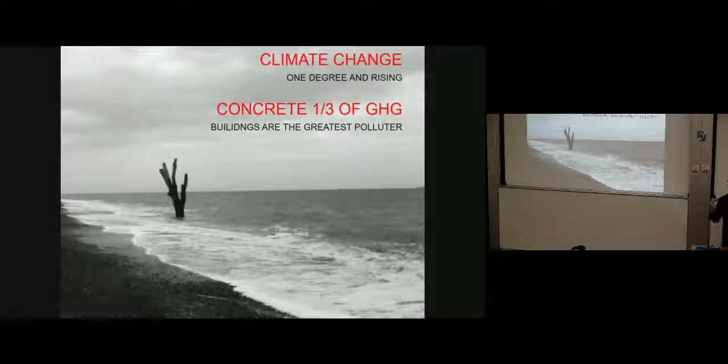The idea of what this climatic event, what this terrible issue surrounding us, did to our architecture, what that did to the architectural expression of contemporary culture, to me, was a nonsense. And that idea, faced with the notion of a world housing crisis, the idea that actually we're moving from a largely agrarian world culture to a largely urban world culture, that we need to start housing billions of people in the next few years.

In the UK alone, it depends which political party or which magazine you read, but between 200,000 and 300,000 homes a year, and last year we built 110,000. So there's lots of work to do, lots of houses to build, and we need to build them in such a way that we don't contribute to climate change, but that we help mitigate climate change.

So this is us in 2003. We were a bit smaller then, and as you can tell, we built mostly nightclubs and restaurants and house extensions and kitchens and that kind of thing. And in 2003, the first set of planning guidelines came out in terms of environmental awareness, and eco homes it was called.

And eco homes said that if your building wasn't near a bus stop, then you would need double glazing. However, if it was near a bus stop, you'd be okay. Now, as an approach to climate change, that struck us as rather short-sighted. The idea that there were just small changes that we could make, with this massive impending problem coming toward us, seemed to us fairly ridiculous. So we started to dig a little deeper and think about not just energy use, but also the building materials that we built with, the process of construction, how that worked, what kind of impact that was having.

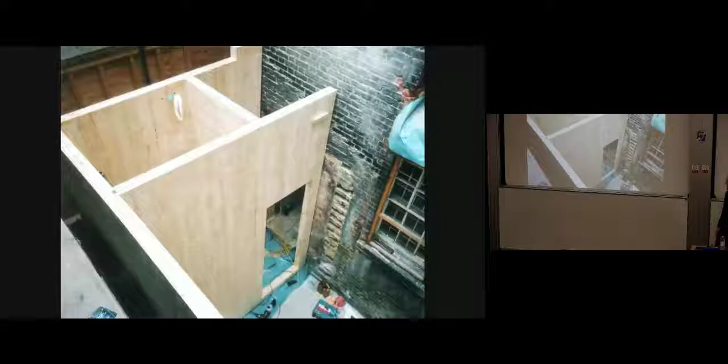I've never been back, by the way, but anyway, it's a 45 square metre, 2-storey extension to a 17th century building near Waterloo. And it was completely landlocked, so we'd been concerned for some time how we were going to get the building materials through the building or over the building.

It was really beautiful. The idea, the notion of the construction process, of the practice of architecture involved in this tiny little building was really, really exciting. And so for the next few years, we researched and designed and interrogated people about CLT. And now this is CLT.

I don't know if everybody knows what cross-laminated timber is, but just really briefly, it's secondary grade timber from the outside of a pine tree, usually a European spruce. So the timber from the outside of the tree, the stuff that gets made into paper and cardboard, that gets chipped for fuel, that kind of thing. So really fairly waste product.

And what they do is they finger joint planks of about 75 millimetres by 25 millimetres into long lengths. They lay them out and they spray them with a PVA, so a water-based adhesive. Like the kind of stuff that if you put on your hand and you go like that, it all sort of wrinkles up.

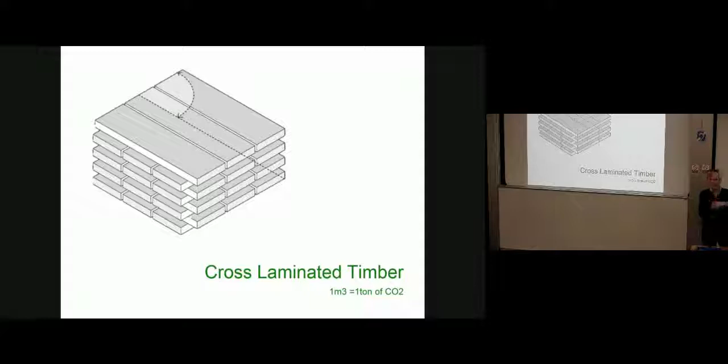So PVA adhesive, and they're laid down in perpendicular layers on top of each other at right angles, and they're built up in layers to the performance that they need to meet, whether they're floor slabs or walls or whatever they are. So less than 1% adhesive, a formaldehyde-free adhesive, and nothing else. So just the pine and the adhesive.

Now the material was invented in Austria in the 1990s because they weren't doing anything with their timber. All the trees that they had were going to seed. And so the word went out from the Austrian government, find something to do with our trees. And so the Technical University in Graz came up with this as a notion. A couple of factories were starting to produce this in the 1990s, including this one, which is KLH in central Austria.

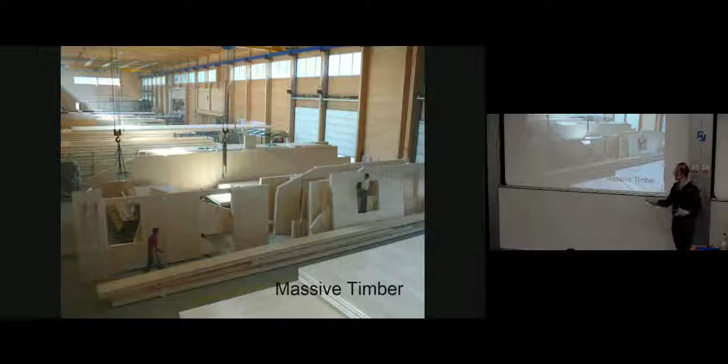Now you can see these panels here coming out of the factory at about 16 metres long by 3 metres wide, and anything from about 70 mil thick to about 500 mil thick, depending on what they needed to do. Now you can see all the doors are cut out, roof profile here, window cut out, and in these factories, all the cutouts go to the biomass generator, and the whole factory is off-grid. So, in fact, in this one, it even powers the village where all the workers live as well.

So in 2008, we had been honing this argument and doing lots of research and talking to lots of different engineers. And in 2008, we really had a pretty clear notion of how you build and what you can build with this material. And we got this job in Shoreditch on a council estate in the part of Shoreditch where people don't go, and it was an old pub site, and it was very clear that from an extrusion of the site plan to about 9 storeys, we'd get about 4 flats a floor, and so we'd get about 30 units on the site.

So we went to the local authority, and we said, we've been studying this material for a long time, and your planning requirement is for us to reduce the carbon footprint of this building by 10%. Now, if we build this building in timber, just the amount of carbon that's stored in the building itself is equal to the amount of carbon that the building will emit for 25 years. So actually, that 10% reduction is over 25 years' worth of energy use.

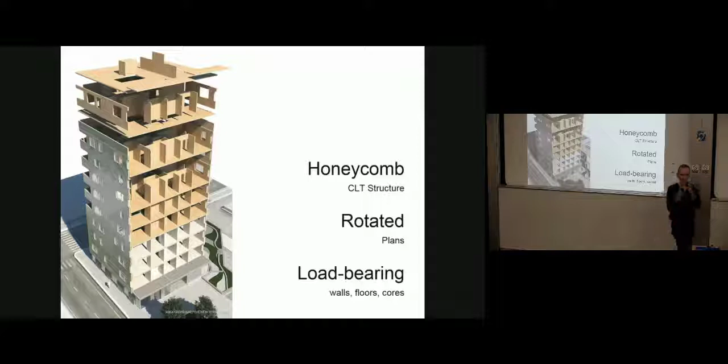So we were able to, this should be a film. Is it going to be a film?

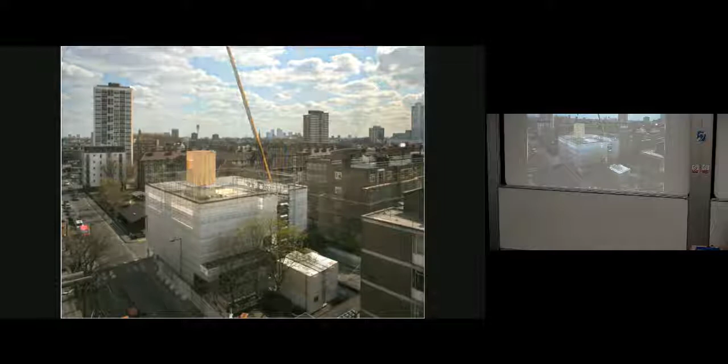There you go, look. So this is definitely the part of Shoreditch you haven't been to. This is the stairs here, lift core going up here, and the slabs going around. So the Austrians arrived by truck on a Tuesday morning. They put panels up on a Wednesday and Thursday. They worked a 3-day week, and they built a story a week. So 4 people built the entire building in 27 days. So you can see it going up here, no tower crane.

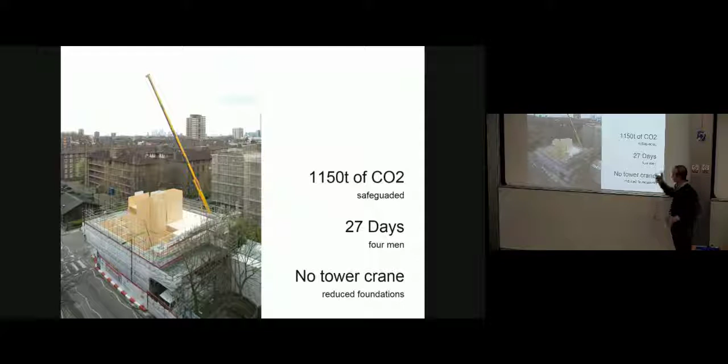So over 1,000 tons of carbon dioxide safeguarded within the timber structure itself, no tower crane. A tower crane costs about £80,000 a month to hire. And you need to put in special foundations for a tower crane to set into. So not having a tower crane is a major advantage to any contractor. So obviously, we were able to persuade our client to build this building in CLT. And they sold all of the flats in 1 hour and 15 minutes.

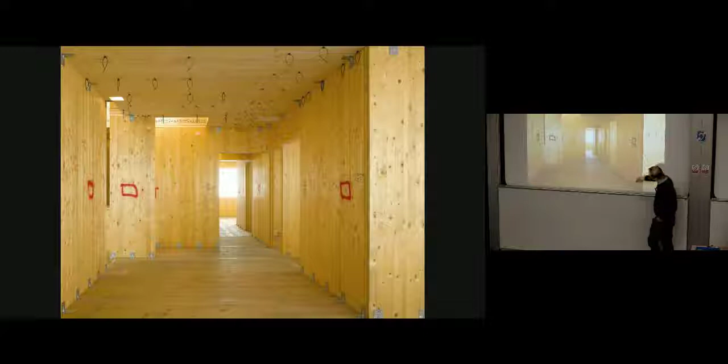So this is the internal structure here. You can see this is one of the double height spaces here. This is the building going up. So you can see the whole thing is put together, fastened together with 75 millimeter galvanized shelf brackets and 100 millimeter screws. You can see in the ceiling here, these are the little ties for the electrics. So the electric cabling that runs through the ceiling.

The electrician explained to me that when you apprentice as an electrician in the UK, you spend about the first 18 months hammer drilling into concrete. And then after about 18 months, your shoulder joint disintegrates. And when it's disintegrated, then they teach you about electrics. So he explained to me that actually, not just in designing these buildings, but in the construction of these buildings, the builders working in these places are safer and happier. It's a better working environment, a better place for a builder to be. And much, much faster.

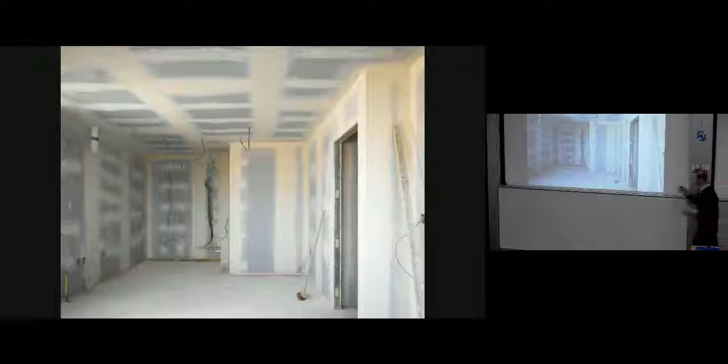So some of the advantages that we hadn't realised, that we hadn't calculated in terms of the speed, was actually the people that came in afterwards. So all the people that did the dry lining, the plasterboarding, all the people that did the electrics and the plumbing, so much quicker, so much easier to do. So once we had finished the entire structure, we covered the whole thing with plasterboard, which for many people, going from that to that is a bit of a tragedy, oh, but where's all the timber gone? It's so useful.

And I think for us, the mantra was from the very beginning that we need to demonstrate that timber can be a viable alternative to concrete and steel. That going back to the notion of actually building with a carbon store, rather than allowing our practice to be a peripheral one, those sort of sustainability practices with the hair shirt and the buildings that look very much like they're sustainable buildings. We didn't want to be involved in that.

We've never wanted to be a peripheral practice. We want to be a mainstream practice, working with the big house builders, making real differences to the sustainability and the environmental awareness of how we build all of our homes in the UK, not bird-watching centres or National Trust museums on the outside of town, but actually real understanding.

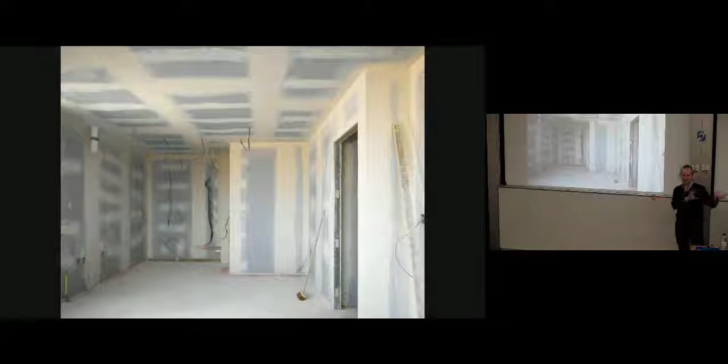So when we were working through the building regulations, our client said to us, we don't want anybody to know that this building's made from timber. And so you're like, fine, not a problem at all. Just a little article in the Evening Standard about it, but apart from that, we won't tell anybody. And covering it up in plasterboard actually means that we don't have to paint any of the CLT with intumescent. We don't have to fireproof the timber itself.

So actually the life cycle, the cradle to cradle idea of the timber, is that this material, after its useful life, can be reused for buildings, can be pulped for paper, can be chipped for fuel. Unlike if you paint the timber with intumescent, and then that goes to landfill at the end of its life. So the idea was that we kept the material breathable, fully recyclable, and for our fire protection, we looked to plasterboard.

Now, we won't be doing that forever without learning as we go; as people, other architects, including ourselves, better understand the way that the system can work, we'll leave more of it exposed. But when finished, it looks like all the development flats that our developer client was after. And as I say, they all sold in an hour and 15 minutes.

So going back over the job, less waste. This is our site waste after 9 weeks. The contractor had this old guy with a little rolled up cigarette in the corner of his mouth and a broom with nothing to do on site for 9 weeks. Completely quiet. The whole building goes together with cordless screwdrivers. So no jackhammers, no grinders, no cement mixers, no constant scurrying around with masks and gloves and goggles. Very, very quiet, very, very clean process.

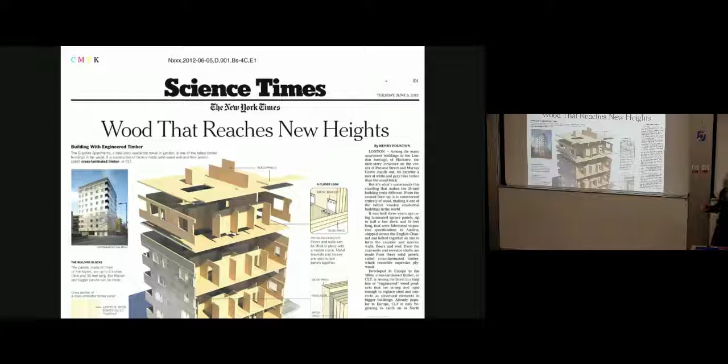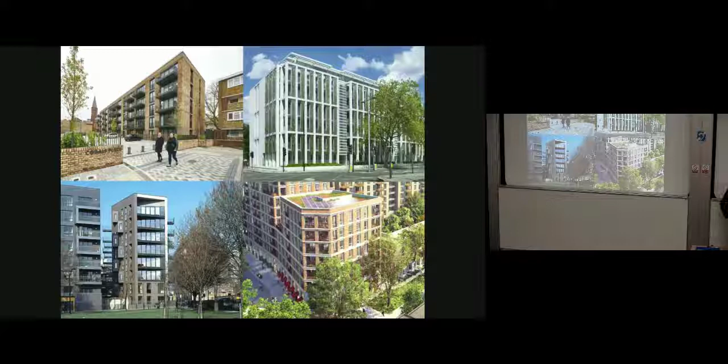So this article in the New York Times and others encouraged us to take this research and really run with it, to talk to people and teach about the research that we'd done. And to our amazement, this had produced a groundswell of interest behind this project. And this followed in London with many other projects. This is a Lend-Lease project, Horden Cherry Lee, Alex de Rijke, Allford Hall Monaghan Morris here. Lots of different projects coming through.

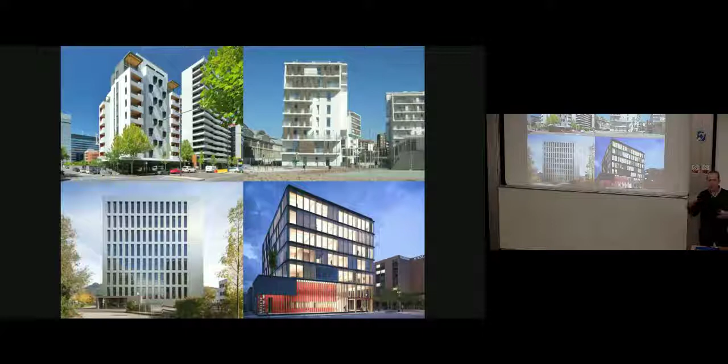Nearly 500 projects in the UK now built in CLT. And then across the world as well. We've worked consulting in Australia, in Italy, in Canada, Austria, on different projects. So really, suddenly the beginning of something. The beginning of a new idea about how we might build buildings. A new system, if you like, of construction and architecture.

So in 2012, finally, with two friends of mine, I found a site to build a house on. With my two friends, Jason and Dan, we bought this piece of land here. We sold our flats and our furniture and everything we had, bought the site, got planning consent, and ran out of money. So we sold the lower ground floor here, then went out to tender to the builder, agreed a tender price, and then sat the builder down and explained to him that we didn't have any money.

So we managed to persuade the contractor to lend us the money to pay him with, and he accepted. So, bizarrely, we paid him back once we'd finished the building. This building was a photographic studio for Dan, and flats for Dan, myself and Jason. It was supposed to be me and Dan and Jason, but Dan and Jason fell out, so I had to move in the middle. But they're friends again now.

Dan is a photographer, and Dan needed a studio which had to be a minimum of 9 meters wide, 6.5 meters high, and 23 meters long, with no columns and no beams. So how would we produce that? How would we make that space happen and still get our flats on the top of the building, which is what we wanted? What we did was to begin to use the CLT in a way in which you wouldn't be able to use any other kind of material.

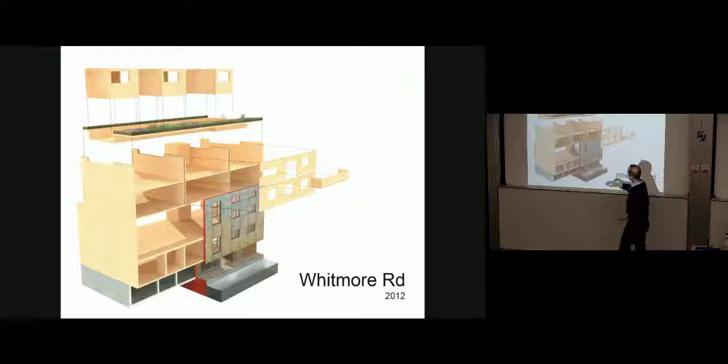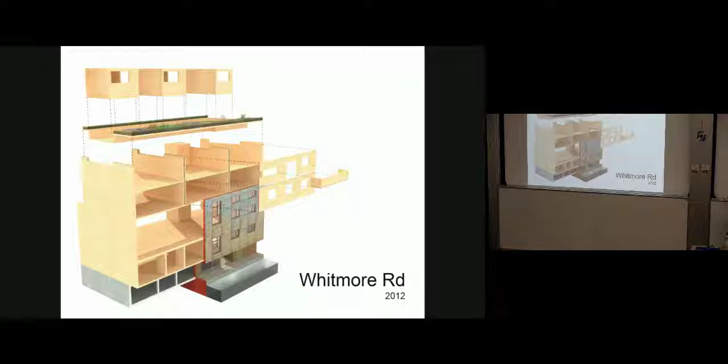The notion is that a wall in cross-laminated timber is a long beam, because rather than carrying the load straight down, it can carry the load all the way along as a beam. So we use the party walls between each of the flats as a deep beam, like a series of boxes, supported off the front and rear elevations, which act as giant trusses either side. That way we were able to hold the flats up above the photographic studio and have that studio as a completely open space. You can do that because of the light weight of the material as well. So the whole thing is really tightly tied together.

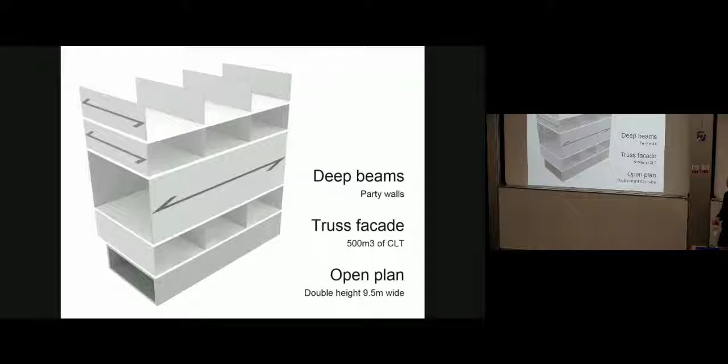500 cubic meters of CLT. So it's about a third of the CLT per square meter that we'd used on Murray Grove, mostly because I was paying for it myself, and it's quite expensive. Completely open plan, as I say, and this is the building going up. You can see this is the studio here.

The other thing we did is that rather than cut holes in the CLT panels, we've begun to use the CLT where it's needed most. You can see this is where the vertical loadings are going, using this as horizontal here, and here as the lintels across. So rather than cutting holes out, we're actually cutting down strips of CLT and using it in that form.

So this is the photographic studio in here. Hard to really understand quite how massive that space is. About a year and a half ago, we had the English rugby team in there doing one of those photo shoots where they all jump up and go like that. And I was fast asleep up here, just above the fire alarm, and I didn't hear a thing. So that's us, the first Christmas, clad in sweet chestnut.

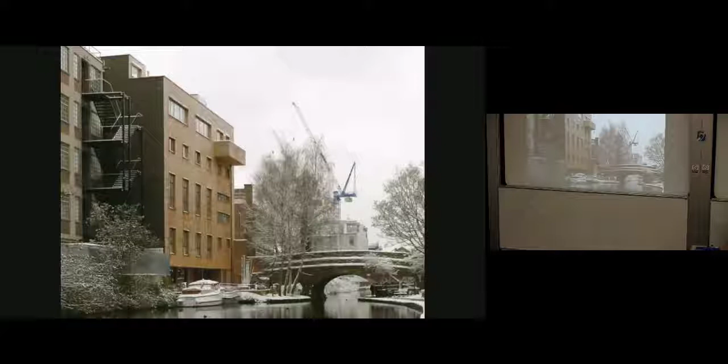I think what that building begins to do is to begin a conversation about something completely different, something completely new. If you think about 100 years ago, when the idea of reinforced concrete came to the fore, you had Corbusier and the other modernists talking about a new kind of architecture. That new kind of architecture came from a new material. And we now have a new material. We now have a suite of new materials in engineered timber. The kind of architecture that new material will begin to propose is what's particularly exciting at the moment. So what will these new buildings look like?

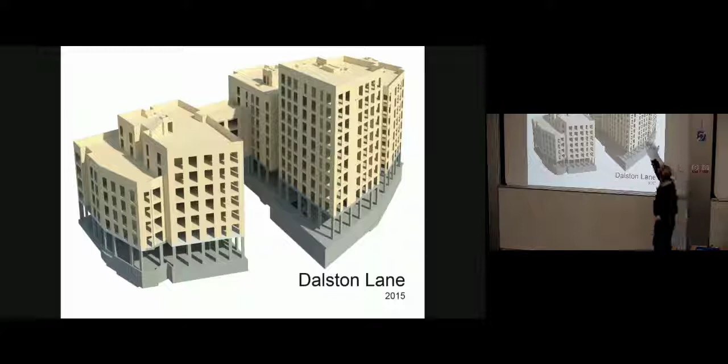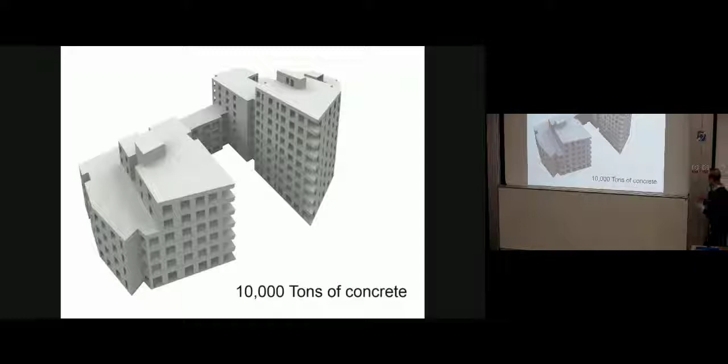So this is Dalston Lane, the building that we're working on at the moment, just finishing up. And this is proper. This is what we wanted to do. This is high density, high rise housing, about 10 stories, 121 flats, and 3,500 square meters of offices and retail, right in the middle of Dalston, in North London, a very urban, very tight environment. If we built the building in concrete, it would have weighed 10,000 tons. In timber, it's less than 2,000 tons.

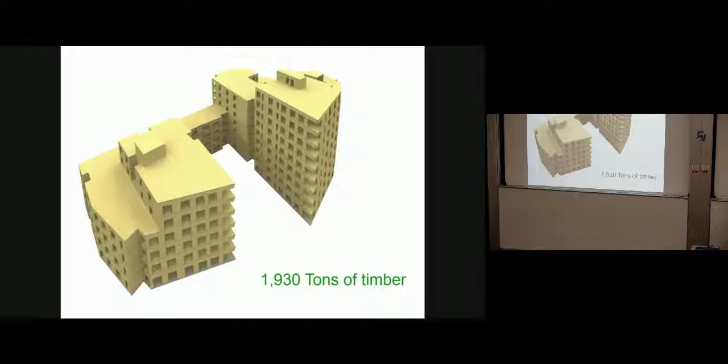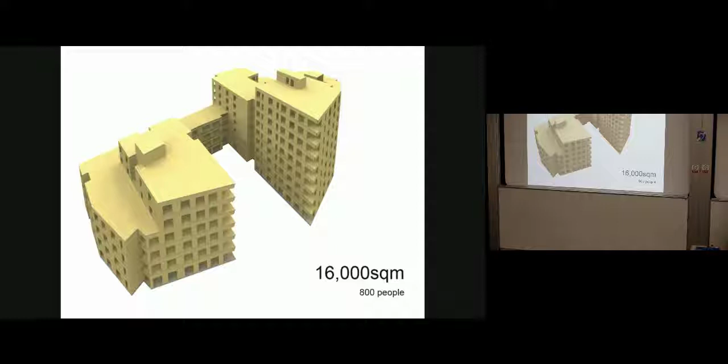170,000 square feet, 16,000 square meters. About 800 people will live and work in this timber building, which is about 4,000 cubic meters of timber, which is 2,500 trees. So just over 3 trees, 3.125 trees per person in this building.

Now we give away one of these buildings every day and a half on the tube in London in terms of free newspapers and free magazines. So the timber that goes to make this building is given away every day and a half on the tube. So this is us. This is a CGI of the building finished.

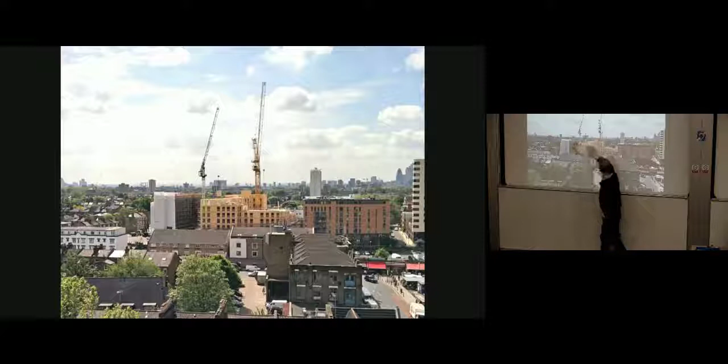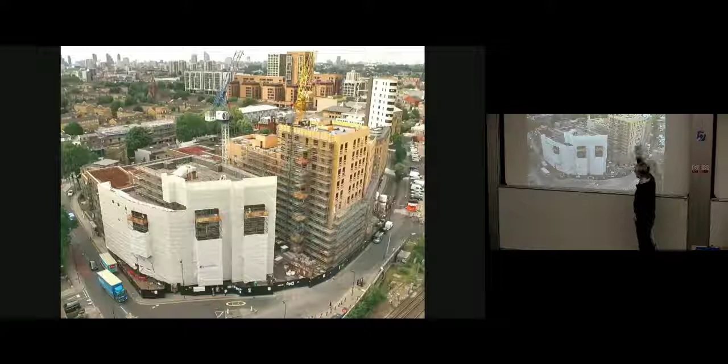So you can see the building going up here. And as I said, really tight site. You can see the timber coming in here. This is us in the summer. So phase 1, which is 7 stories, finished. Phase 2 at the back here, about halfway up. And this is us about 6 weeks ago. So this building will go up in just over a year, about 18 months. The whole building will go up. Yeah.

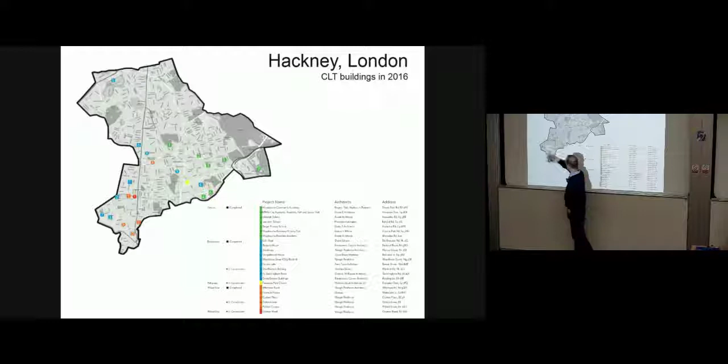So the buildings that we've been working on, this is Hackney, where we work and where I live, and the more we research, the more we've become involved with local politics, with local politicians, with the planning office, really begun to infect our borough and become part of the area that we're in. Never did I think when I was at architecture school that I'd become like a local architect, you know, like a local doctor or something. But this seems to have happened to us in Shoreditch.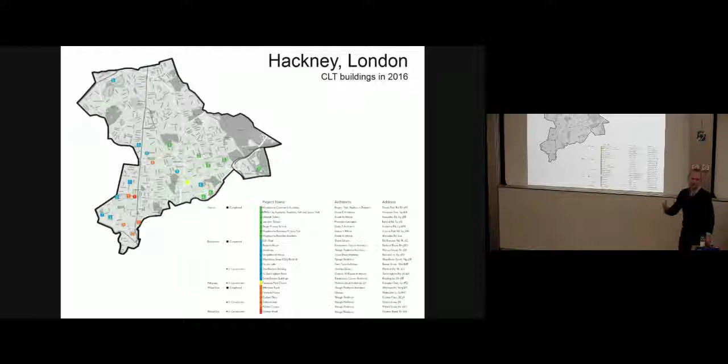So we now have a greater concentration of tall CLT buildings in Hackney than anywhere else in the world. We have a mayor in Hackney who is proposing and promoting a timber-first planning policy, so that all buildings in the borough must be built in timber unless you have a good reason not to build them in timber. So this is really exciting stuff.

We've started working for Berkeley Homes, so the UK's biggest house builder. We built this building. 5-story, 18 apartments. You know what? We built the entire structure in 3.5 weeks on a 5-week program. So we saved a week and a half of a program that they didn't think could be done. 100% CLT, so no concrete in this building at all, right from the ground all the way up in CLT.

And now this building is being monitored. So this building has electrodes all over it, inside and out. The acoustics, the thermal use, air tightness, energy use, all being monitored through the building. And also, the people that have bought these flats have agreed to be monitored as well, quite difficult to evaluate, but monitored in terms of their well-being, if they feel happier being in a timber building.

Because this is an interesting thing that's coming through, the feeling of well-being that people are expressing to us living in a natural environment rather than in a cold concrete or steel environment. Living in a hygroscopic material that soaks up moisture from the atmosphere, releases moisture into the atmosphere, that is actually more friendly in acoustic terms.

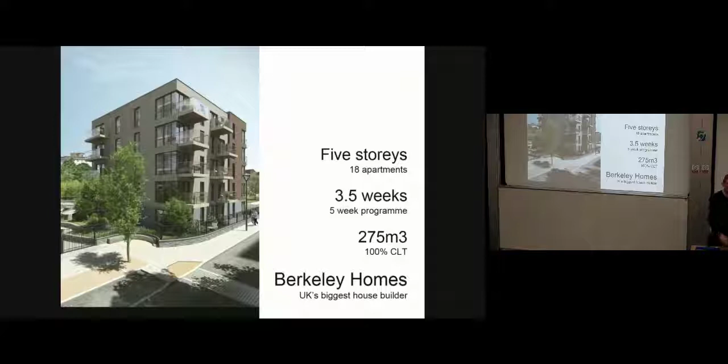So this understanding, that feeling of well-being, how does the system not only affect the architecture, the construction process, an idea around climate change, but also the people that live there, the people that work there in these buildings, and how they're affected by this different construction system. Now, excitingly, we're starting to work on larger and larger schemes.

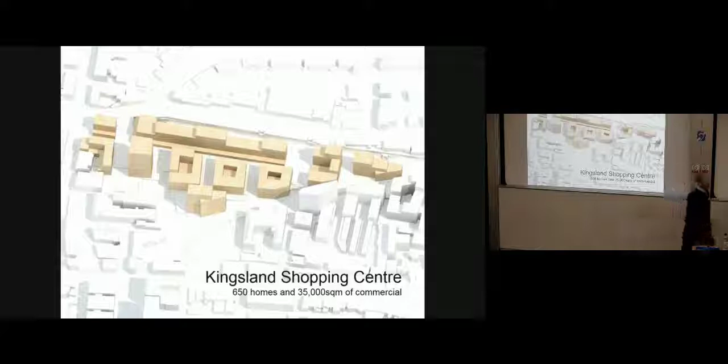So the Matalan has survived for years untouched in Kingsland Shopping Centre. But this gives us the opportunity to look at this site for redevelopment. So 650 homes and 35,000 square metres of commercial and residential development there.

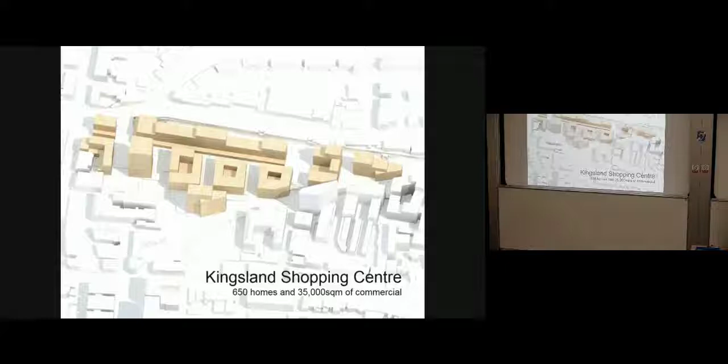And now, this year, we've started working for Legal & General. I'm sure everybody's heard of Legal & General or seen the umbrella sign around. 70% of adults in the UK have some level of financial dealing with Legal & General. They insure everything. They're one of the biggest global funds. They have a £750 billion fund in the UK alone. So this is a massive fund.

About 3 or 4 years ago, they stopped putting all their investment in stocks, and they started buying land. And then they decided to develop some of this land. And when they looked at development, they looked at construction, and they thought, well, that's an awful process. That's just terrible. We don't want to have anything to do with builders. So we should prefabricate them in a factory, and if we're going to do that, we should do it ourselves. And if we do it ourselves, the best way to do that is in cross-laminated timber. And if we're going to get cross-laminated timber, then we should make our own cross-laminated timber.

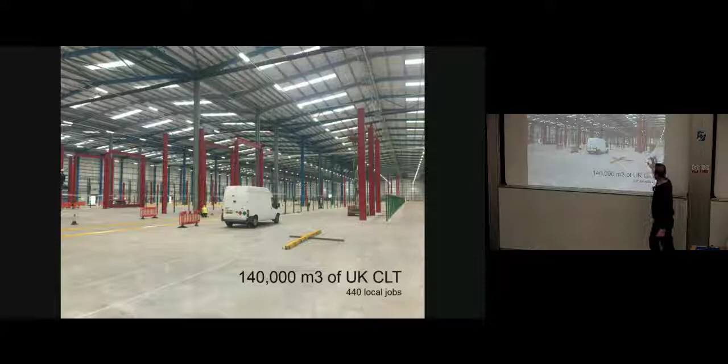So earlier this year, they bought a factory in Yorkshire, an 850,000 square foot factory. And by summer next year, they'll be producing 140,000 cubic meters of cross-laminated timber, which means the UK will have the world's biggest CLT producer. And we are starting to make modular homes in this factory on 14 production lines, where we're making timber homes which we're taking to site on the back of a truck and building up into massive housing, which is just so exciting.

This takes all that idea of Tony Garnier and the Cité Industrielle, those conversations Henry Ford had 100 or so years ago, about the idea of a production line, a machine for living in, about how we can actually take this arcane construction process that we've been locked in for hundreds of years off the construction site and into a factory-controlled environment where people can work undercover, where we can build buildings effectively, cost-effectively, and of high quality.

Always before, the dream of modular housing has failed because people have used poor materials. They've thought the only way to do this is to use lighter and lighter material, less and less material, and to build smaller and smaller housing, and only one type of housing. So they said, we've done modular housing, but it's made of cardboard, you can touch the ceiling, and it'll fall apart in 10 years' time, and as long as you're happy with that, it'll be okay. So that's been the previous notion of modular housing.

Whereas what we have here is a factory floor, we have our material, and we can make whatever size of box we can get down the road. So the first thing we do when we get a site is we look at the postcode, we phone up the haulage company, and we say, how big a truck can you get to this postcode? And they come back and say, we can get a 5-meter wide truck to this postcode. So we go back to our drawing boards and say, great, we're going to make a 5-meter wide modular housing.

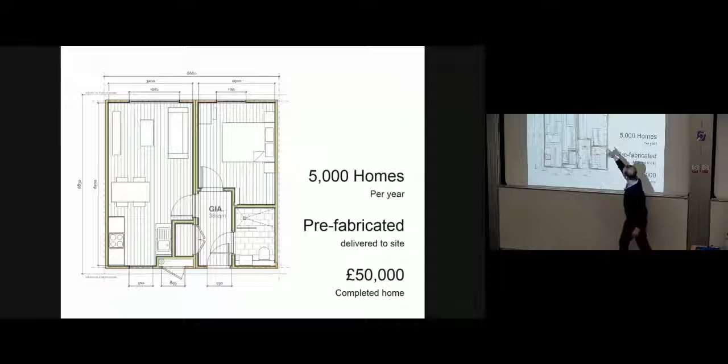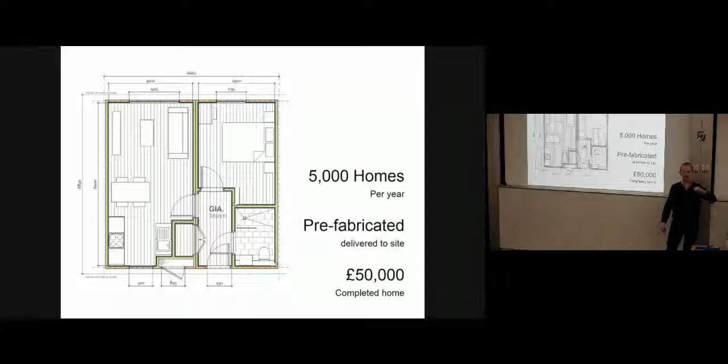So this one here, for instance, is 3.2 meters. This is a pocket unit, a one-bed, one-person, affordable housing model in central London. We can build these for £50,000 and have them delivered to site with all the windows, all the bathrooms and all the kitchen pre-fitted. And these are solid buildings. These are not buildings where, when you hit the wall or flush the loo, your neighbour can hear. These are buildings with solid 4-inch thick timber walls. Buildings built of timber.

So this is what they look like. And you know what, we build all this stuff in BIM. So suddenly, in 13 years, we've gone from a practice that designed nightclubs to one that has just been named BIM Practice of the Year. I never thought that would happen to us.

But you know what? The exciting thing is that what we're drawing on our machines is what ends up on site. Now that hasn't happened for a long, long time. The idea of the architect as a sort of vague dandy at the end of the table who decides what color it's going to be, and everybody else will get on and build it, that is gone.

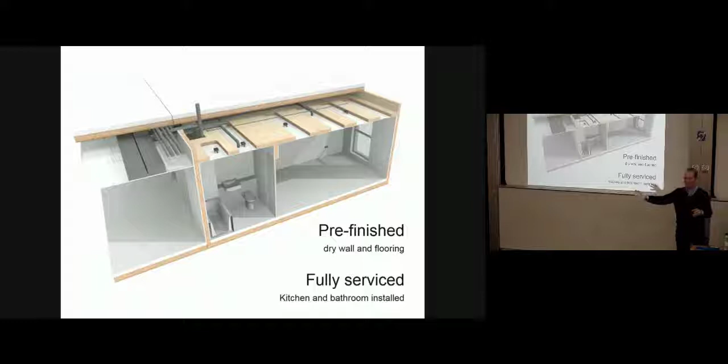That notion is gone, because the buildings that we're building, the decisions that we're making about where the cuts are made, those are the same files that we're drawing. Those files migrate all the way through to the factory, to the CNC machine, and that's what's cut out.

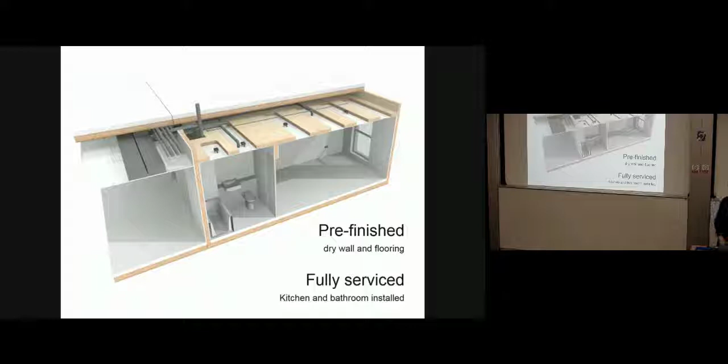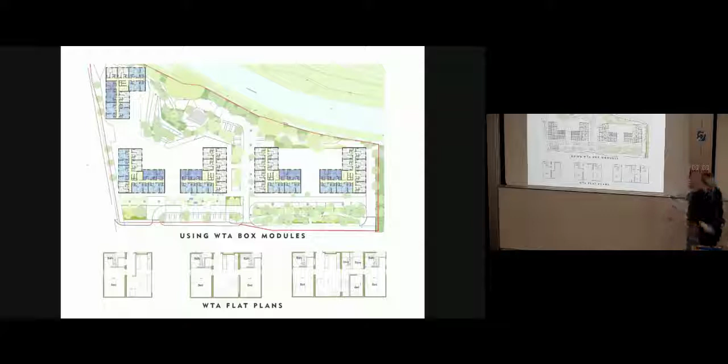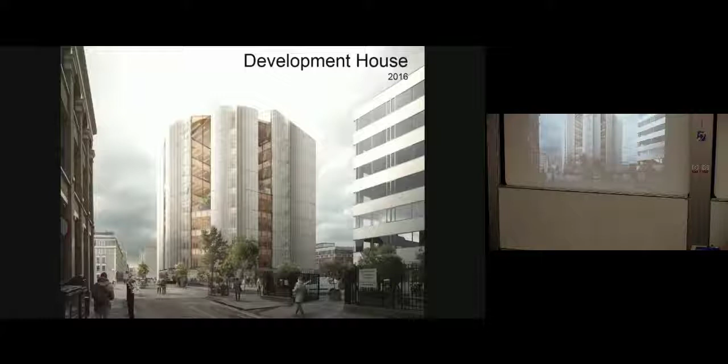And we've also started to build other types of building, not just housing. This is an office building, which we've just been instructed on in Shoreditch again. And this is headquarters for a tech company. This building will be built from glulam columns and beams with a solid CLT core and solid CLT floor slabs. 100,000 square feet, 10 stories. The whole building is programmed to go up in 10 months from start to completion.

And this building really is about, interestingly, when we pitched this idea of doing a timber building to a City of London commercial office developer, we said to them, well, actually, if you look at most of the companies that are going to rent these buildings, their major problem is not how much rent they pay. Their major problem is losing people, training people up and having a fast turnover of staff, because people don't like working in the buildings that you've all been building for 100 years or so.

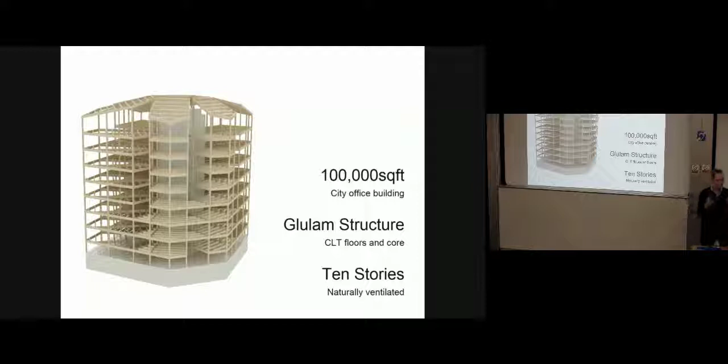People want to work in nice spaces. People want to work in good, healthy, light environments. So this is completely naturally ventilated, as well as being very light and very open as a building.

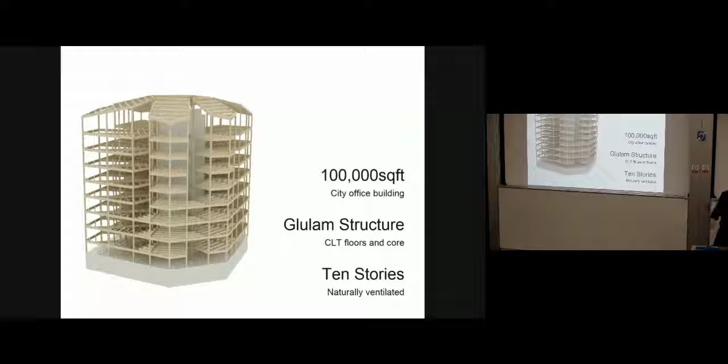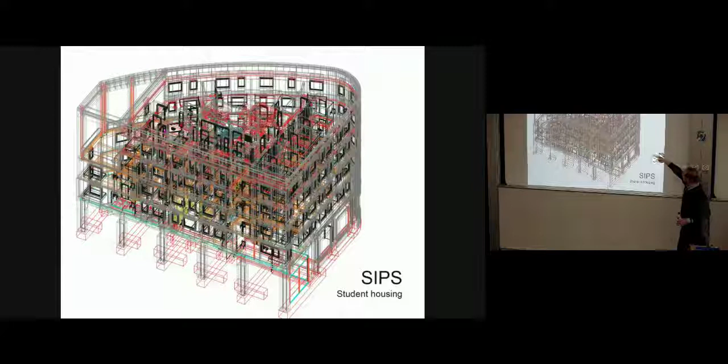And we started building student housing. So this one's in Brighton for an American developer. And this one begins to talk about curves. So we're faceting the corners here with timber SIPS panels on the external facade, and then CLT floor slabs, CLT core, and then CLT shear walls through the building.

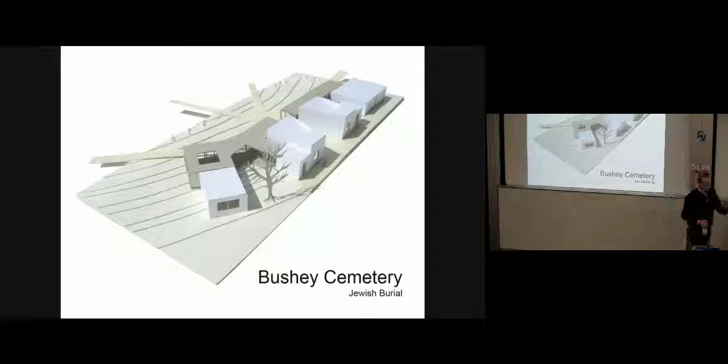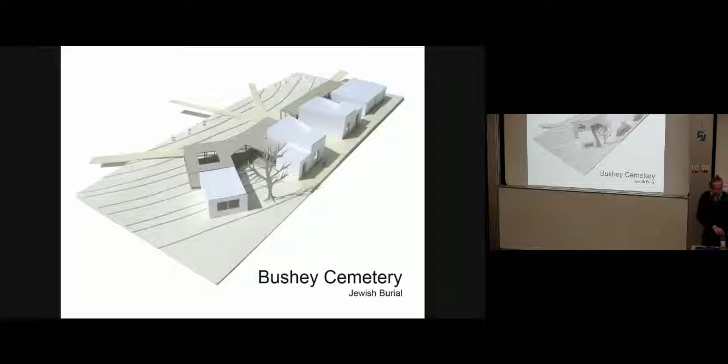We also started working in other materials, not just CLT. So also maintaining the notion that, as a practice, we're looking at low carbon technologies, or technologies that sequester, that hold carbon within them. And for Bushey Cemetery, which is just north of London, we're building this in rammed earth. So we're taking the soil from the cemetery, bringing in aggregates and sand and a tiny little bit of cement, and we're building the buildings from the soil from the cemetery. So those are going up at the moment.

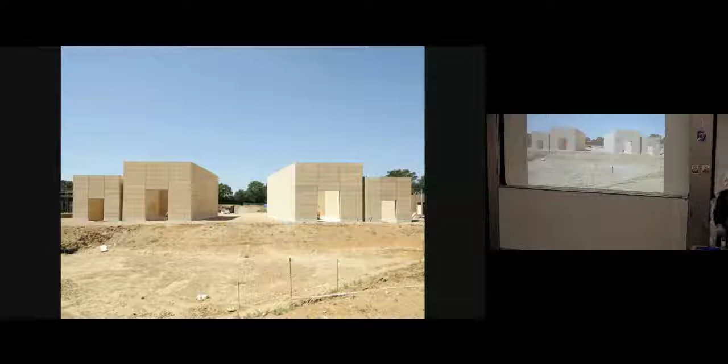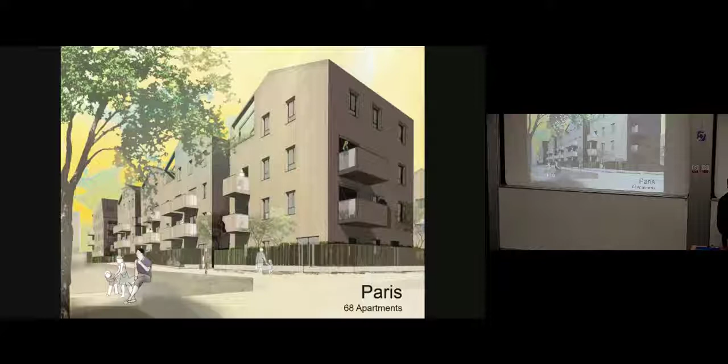And we're building abroad. So now we've got a project that just got planning 2 weeks ago in Paris, another one in the States, and another one in Sweden as well. And we've been working with the US government as well. And, typical Americans, they watch us doing it over here and then think, oh, that looks like a really good idea, we'll do that. And then suddenly do it 10 times bigger and 10 times faster.

But in the Senate, Obama's Secretary of State for Agriculture pushed through a bill to promote the notion of tall timber buildings based on Murray Grove. So there's this little building in the council estate in Shoreditch, and the notion of that building has been promoted in the Senate and put forward as a bill to promote those buildings.

Oh, and we started working with other architects, alongside architects like Renzo Piano and Richard Rogers, and we're working with Shigeru Ban. So with Shigeru Ban, the Japanese architect, we're building a tower just adjacent to City Hall, across from the Tower of London, in Potters Fields Park, which is very exciting, especially because we're working with a Swiss engineer who is about 150 years old. He's like Yoda from Star Wars or something. He's just a genius.

And in this building, we're not using screws or nails to tie the timber together. We're using dowels, little dowels, like in a piece of IKEA furniture. And we're milling the holes for the dowel exactly the same size as the dowel.

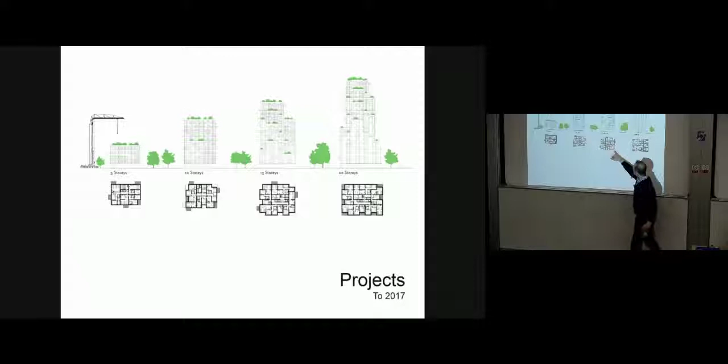So here we are. This year, working on 5 stories for Berkeley Homes, finished 10 stories in Dalston, 15 stories consented in Paris, and 20 stories that we're working on at the moment with IKEA. So really exciting times for our practice. And we have 23 live projects in timber at the moment in the office, and are looking and hoping for more.